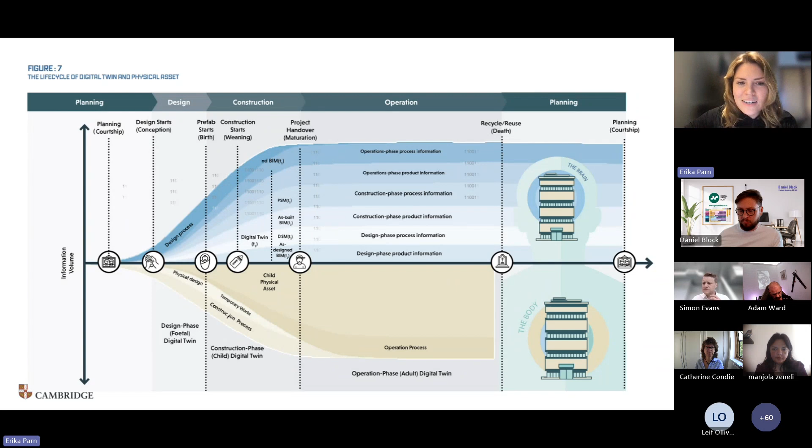As you progress over the timeline of the evolvement of your digital twin, unlike the physical body, when we reach the end of our building's life cycle and demolish these assets, our digital twin has the ability to live forever, to provide value even beyond when that physical asset no longer exists. This isn't the same with the human brain and body analogy - when we die, unfortunately, our brain dies with us. So that's as far as the analogy goes. But part of the thinking about the digital twin life cycle is an important part of our book as well.

So again, twin systems, we wrote it for industry professionals. It's not a technical handbook. We wanted it to become something akin to the BIM handbook, but in a digital twin context. And that kind of thinking was brought to us by Professor Rafael Sacks.

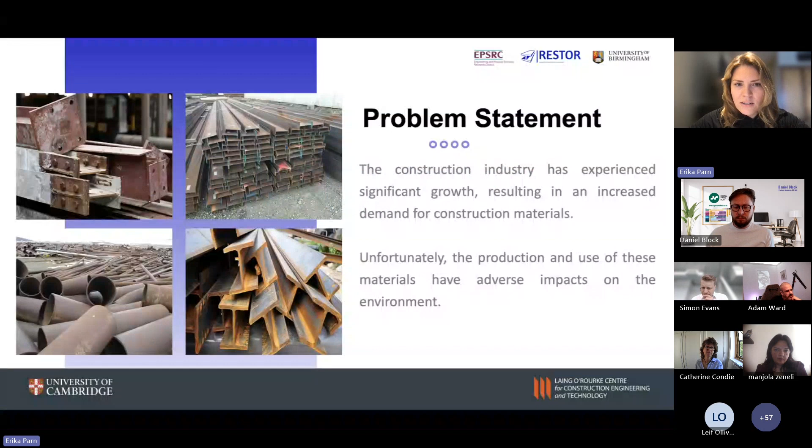And now I'm going to swiftly run through, I have just 2 minutes, Project RESTOR, an example of digital twinning for the reuse of steel. This is an EPSRC funded project that I'm leading together with the University of Birmingham team. And what we're trying to do essentially is to digitally twin existing steel members, a sample selection of steel members.

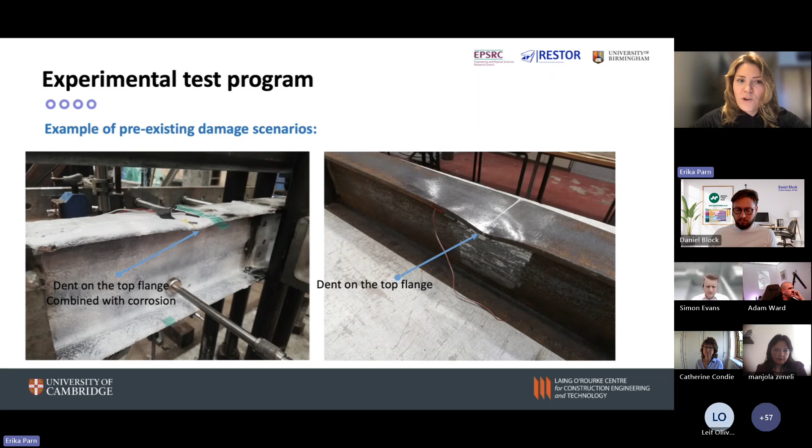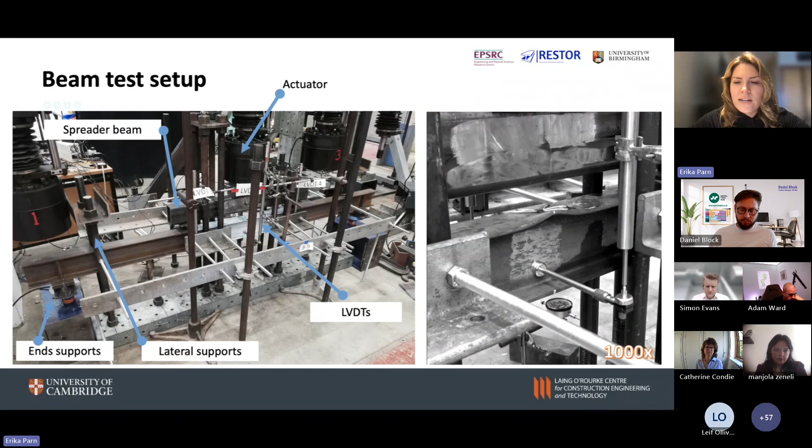And then incorporate those members so that we can reuse them rather than recycle them. So the whole purpose of this research is to try and create as accurate a digital twin as possible of existing steel members and the typical kind of wear and tear that they will experience over its lifetime, from dents to corrosion. And we try and digitally twin these steel members.

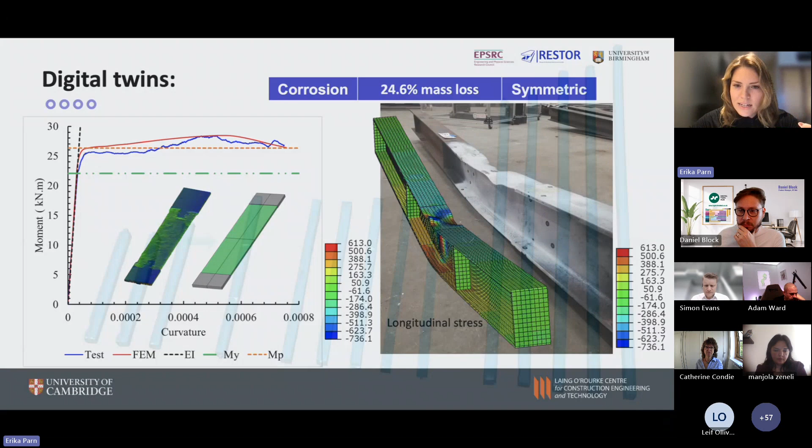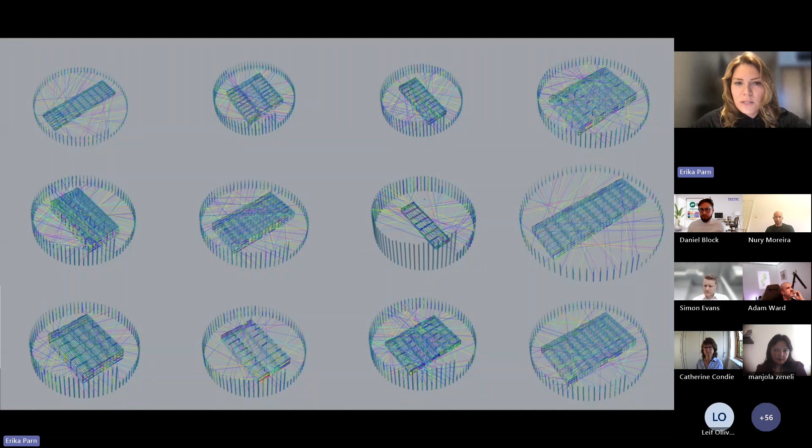And the role of Cambridge University is to take that information and generate software. In this case, we're using generative design tools that can then incorporate both reused steel members and new steel members. And here is a quick example of that, which is a generative design tool used for portal steel frame members, where you're incorporating both reused steel members and new steel members together into a design of an industrial building.

Another last piece of work led by my brilliant PhD student, Hank Lau, is the integration of large language model-based interaction with digital twins, and Hank is leading this work. The key part is really to be able to use large language models to actually interact with and modify data from our digital twins, from model visualization, data summarization, making changes to the parameters of the design files, and summarizing historical data that may be coming through sensors.

It's very simple, a bit like what everyone is now accustomed to, using ChatGPT and large language models to summarize information. But here, the key difference is that we're also able to modify information within our IFC files and actually visualize information from our IFC files and point cloud data as well.